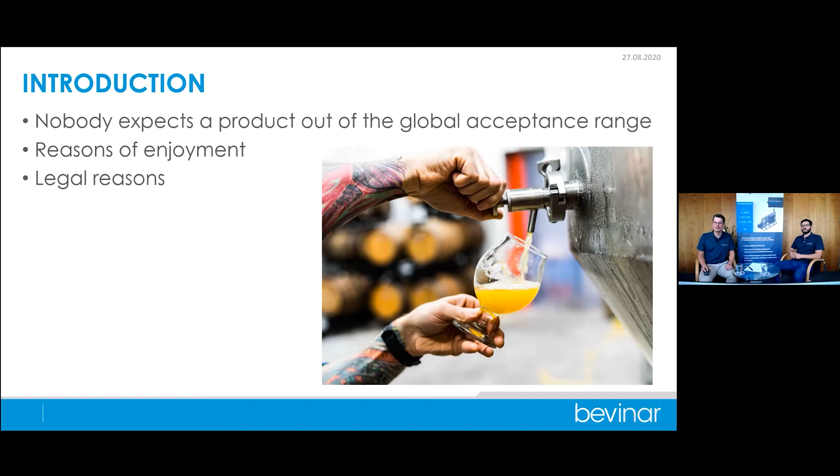Next to those, sparkling drinks or lower carbonated medium mineral water. So there's a wide range, and some brewers and co-packagers have to apply that range to their technical equipment. Some other drinks, as mentioned, carbonated soft drink is one of them. So there is carbonation during the process of fermentation, but if there is no fermentation, you got to make sure that everything gets carbonated during the process.

I'd now like to hand over to Jan, starting with the technical side. Yeah, we will have a look at the technical side of carbonation and blending. First, about carbonation. So the question is, why do we need to carbonate a beer? As we all know, the beer gets its own CO2 during the fermentation from the yeast. And the brewer also has the possibility to adjust the content he wants in the beer by setting the head pressure in the tank. So the question is, why do we have to carbonate afterwards?

One reason is, when the beer leaves the storage tank, a couple of process steps will come, for example a separator, filtration. So here the beer might lose some of its CO2. So it's good afterwards to adjust it to the original CO2 content. You could also say, okay, why don't I carbonate it a bit higher before these steps, but then you can never be completely sure what will be the final CO2 content.

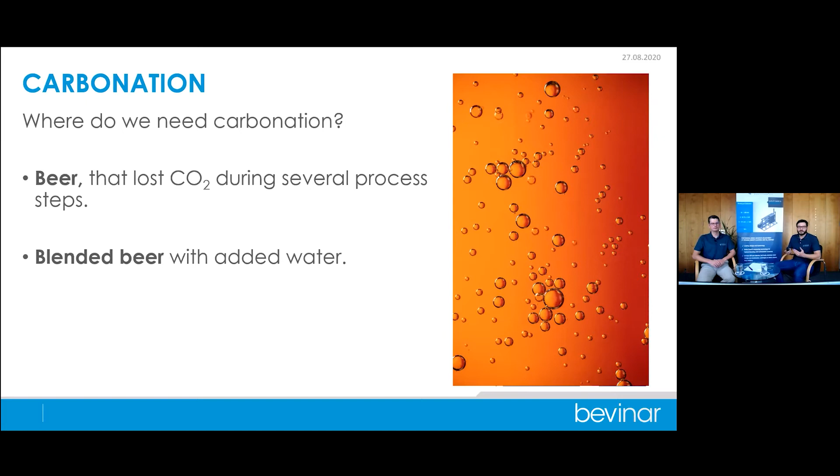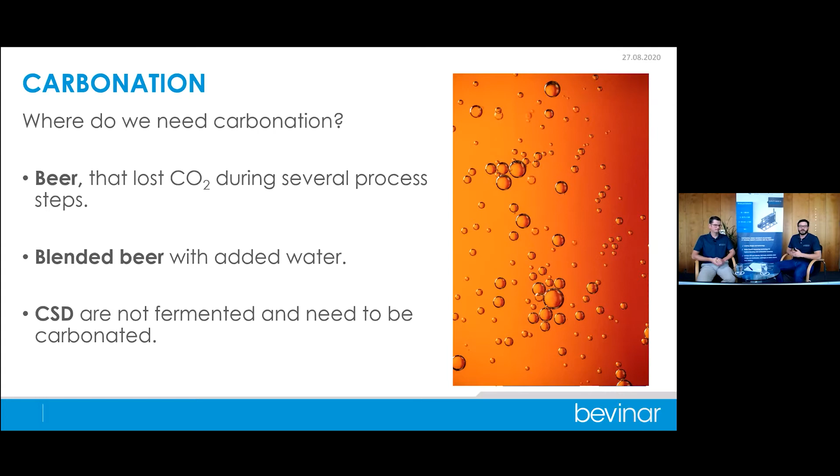Another reason is if you go into blending the beer, this will also be a topic later, you blend with water, which has no CO2, and of course you have to add the CO2 because of the missing CO2 in the water you add. And finally, if you make carbonated soft drinks, they have no CO2, so you have to carbonate from 0 to whatever you want.

I want to have a look shortly at the physical details about carbonation. There are mainly two principles that we need, and every brewer knows Henry's law. Perhaps you don't know the name, but it describes that to get a certain content of CO2 dissolved in the beer, you need a certain pressure depending on the temperature of the beer. This is normally what you have in a table, and you adjust the tank pressure, as I said, and you will end up with the CO2 content you need.

This is also important when we go to inline carbonation, but here it's important to be above this pressure we need. So that's one point. The other point is we want to get CO2 dissolved very quickly. So we need to distribute the CO2 into the beer stream with very small bubbles. When the surface of the bubbles is bigger, the dissolving is much faster.

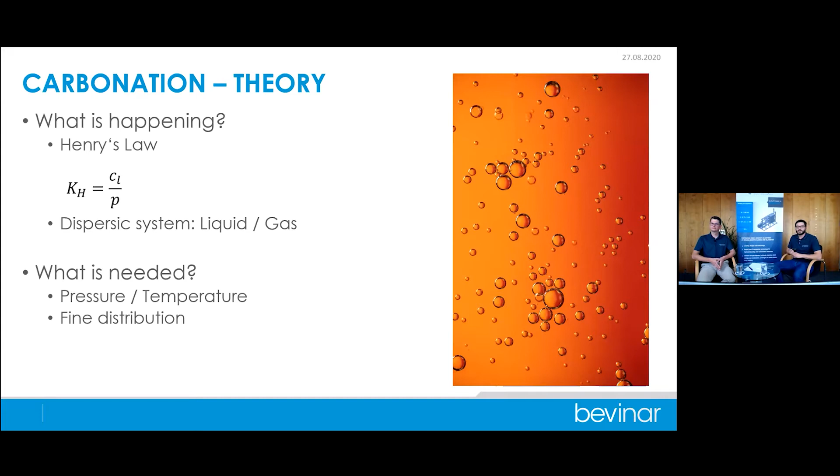The second topic we want to talk about today is blending. There are two main reasons why we blend. One is high gravity brewing. So we brew a beer with a much higher alcohol content, and we blend it down, and then from, let's say, a 100 barrel fermenter, we get out 110, 120, or even 150 barrels of beer. So we can expand our production capacities.

The other point is alcohol trimming. As you all know, beer will end up with slightly different alcohol contents from batch to batch. To ensure you always have the same alcohol content, you can brew a beer a bit higher and then just trim it with a small amount of water. And often many breweries do both, so here the problem is you have a very wide range in the ratio of water to beer. So it is very important to measure very accurately and to dose over a very wide range, very accurately.

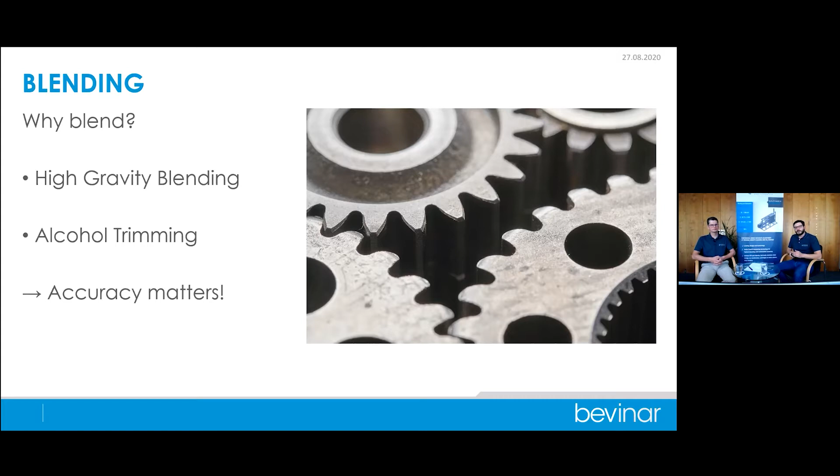As I said, it is very important to know what the final beer has, so we can control it. And for this we need inline measurement. For this we have our partner from Anton Paar in Graz, who will tell us something about inline measurement. So I will hand over to Markus Freisinger in Graz, Austria.

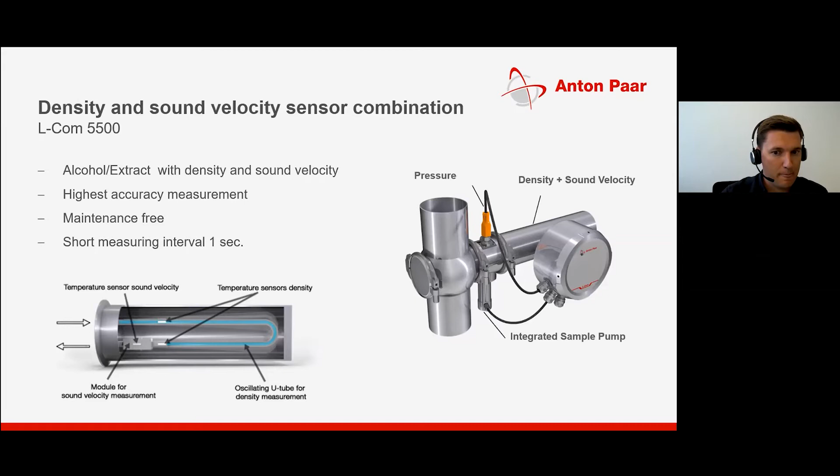In the bottom left corner, you can see the sensor inside. So you have the bent U-tube, which, as I mentioned, is for density measurement, and a small module for sound velocity measurement, as well as temperature sensors for temperature compensation. Additionally, the sensor is integrated with a sample pump to ensure proper flow through the sensor, as well as a pressure sensor for pressure compensation. The L-Com is completely maintenance-free with a very short measuring interval of 1 second.

The second part of the beverage monitor is the CO2 sensor. Anton Paar offers two different sensors. We call it Carbo. So we have the Carbo 510, which is based on a conventional pressure temperature method. And we have the Carbo 520, which is based on an optical measuring principle called attenuated total reflection.

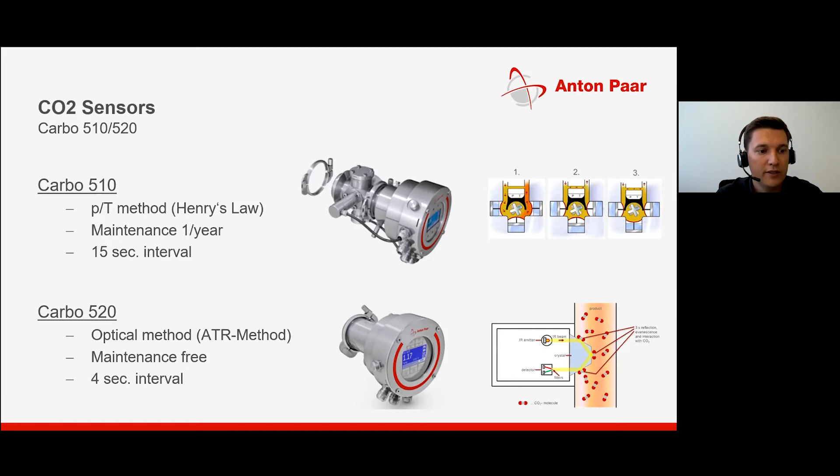The difference is the maintenance and the measuring interval. The Carbo 510 requires maintenance once a year to exchange the membranes inside the sensor. The Carbo 520 is completely maintenance-free due to the optical measuring principle. The measuring interval of the Carbo 510 is 15 seconds. In comparison, the Carbo 520 has only a 4 second measuring interval.

Also, the MPDS 5 evaluation unit is part of the beverage monitor. It gets the raw values from the sensors. For example, from the L-Com, the MPDS gets the temperature, the density, and the sound velocity. And with these raw values, the evaluation unit calculates the measuring values like alcohol and extract and distributes them to the PLC.

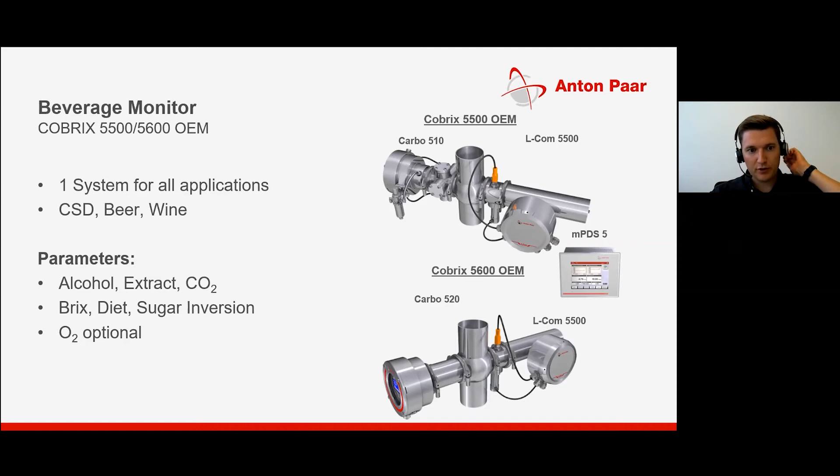The beverage monitor is a system for all beverage applications, so you can use it for carbonated soft drinks, beer, or wine, for example. Depending on which product type you choose, you will get the required parameters. So for example, if you have a soft drink production and your product type is a soft drink, then the sensors will calculate the Brix value instead of the Plato value. You can also configure the system with an optional O2 sensor.

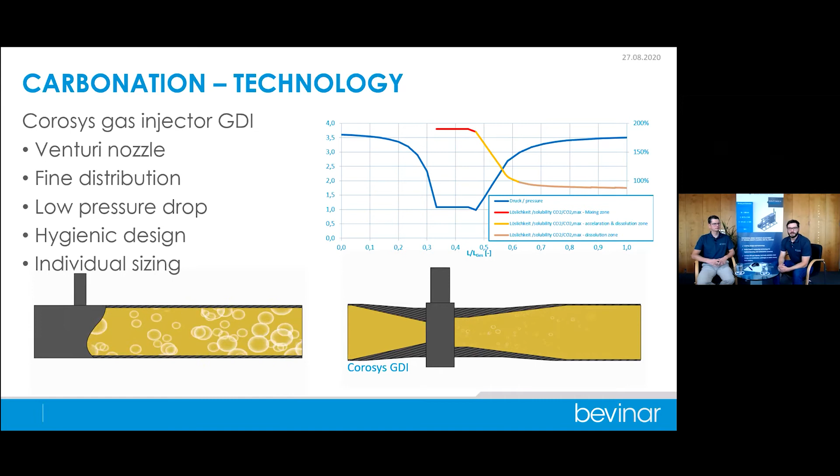Then when we have a look at the blending technology here, as I said, the big point is that we can blend a very wide range, from alcohol trimming with a small amount of water up to high gravity blending, sometimes from 14, 15, 16 Plato down to 10 or 11, which means almost half of the beer is water. This we can do with two different control valves, a bigger one and a smaller one.

And here, not only the control valves are important, also the automation and the controls of these play a very important role for the accurate and very fast adjustment of the alcohol or OG content. So we have here multi-step controllers that work together to get a very quick adjustment.

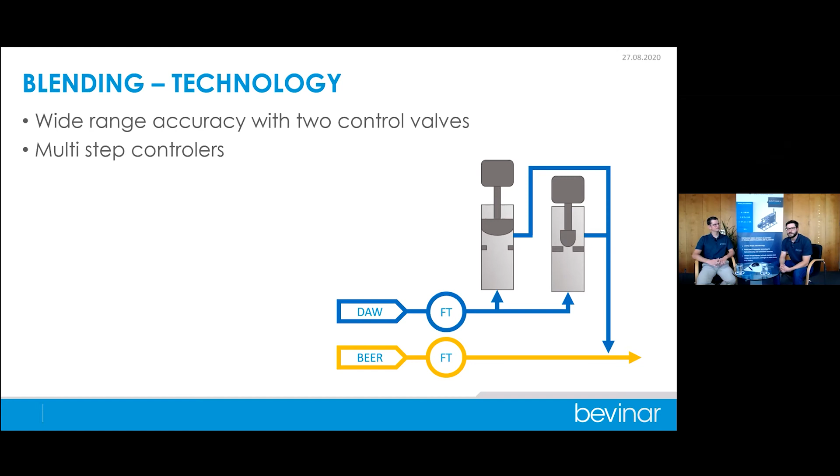Here we see the Corosys blending and carbonation system. As I said, often the blending comes with the carbonation because you need to carbonate at least the water part you blend. So you see here is the injector. The CO2 is distributed here via this control valve. To get the pressure in this dissolving pipe, we have here a pump, and here we have a control valve to ensure that we have the minimum pressure we need to get all CO2 dissolved at this time.

At the end of the dissolving pipe, we have the instruments from Anton Paar. It's the alcohol or OG measurement, CO2 measurement, and as an option, the O2 measurement, and of course also pressure measurement so that we can control the pressure.

Second part here is the blending part. See the two control valves. So the water is just dosed here right before the pump, and we have also the advantage that the pump will also mix the beer and the water properly. So a couple of seconds later, when the beer arrives here at the inline measurement, it will be mixed properly, CO2 will be solved, so everything is okay for a proper measurement.

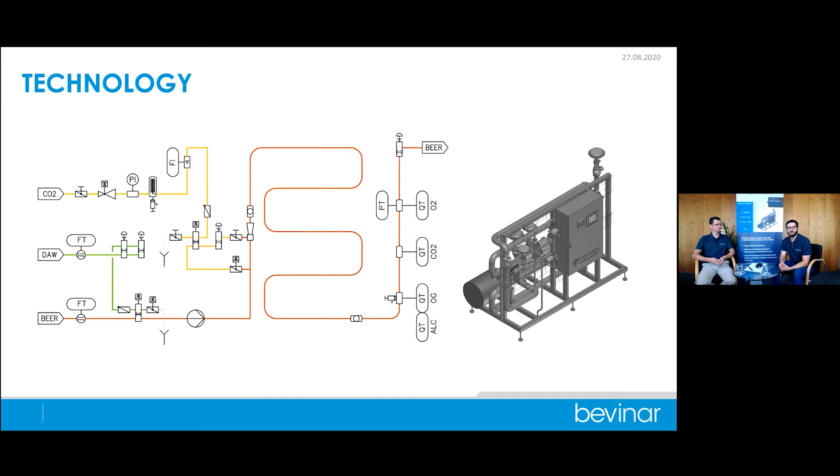Okay, so as Jan explained, most of our systems are built as units, as pre-manufactured design units. However, the design can change by the customer's demand.

So here's an application example from one of our customers in the United States, a big, very well-known craft beer brewery, Avery Brewing, Boulder, Colorado. And actually our very first customer in the United States. So Avery came to us asking, hey, is it possible to have the carbonator running after our centrifuge, but actually not use the buffer tank?

So a little explanation of what is happening: when you centrifuge your beer, there's always this discharge stop, where the solids go to the drain. And this actually means the beer flow will stop suddenly, just from one moment to the other, which will also result in having no flow within the carbonator. Without flow, you won't have any carbonation effect because the Venturi tube won't work, of course. So without any Venturi effect, you can't dissolve your CO2.

So what are we doing? We are using our controls. We are using the accurate and very fast control here, added with a recirculation loop. So the beer will recirculate within the system until the centrifuge restarts. Once the centrifuge has stopped, the carbonator will also stop. That works with signal exchange and smart controls within both systems.

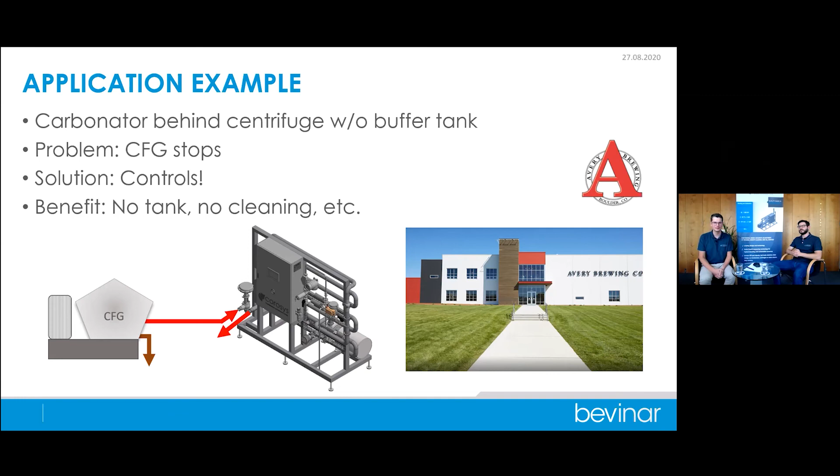That means you are saving time to prepare the unnecessary buffer tank. You don't have to clean that buffer tank. You will also save carbonation demand in comparison with carb stones, for example, or any other inefficient method to carbonate. And for those guys out there who are dry hopping, you can save on hop aroma, of course, because you don't strip that much out in your bright beer tank as with carb stones.

For the blending, we will see an example calculation right here. The correction of original gravity, as an example, just by 0.2 degrees Plato from 12.7 to 12.5, results in a correction value of just 1.5%. You can make your own calculation how much that is of annual output, and that's directly raw material saving and capacity increase for free, so to say. It's time saving as well, as you don't have to re-dilute in your bright beer tanks or make mix calculations first and pump it all around your tank.

And of course, it's easy handling. You type in what you want into the system and it brings you there, as well as with the carbonation. Last but not least, constant quality. As mentioned before, you are probably facing problems with taxes because of bringing in beer with higher alcohol, or having to put lots of effort in order to bring it down. So this system will help you to make it just right from the first shot.